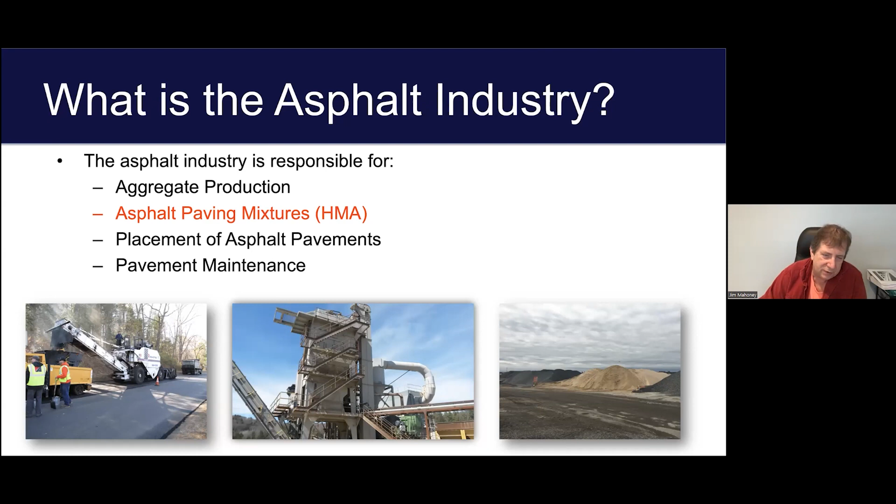So when do we take temperatures? We talked about the importance of temperature during production last week. We also need to check it out in the field, because if the material arrives really cold out in the field, you're not going to be able to compact it very well. And if you can't compact it, it's going to allow a lot more air voids in that material.

And those air voids are going to allow the oxidation to occur, and you're going to end up with a pavement failure. We want to check the temperature at the back of the screed as the material comes out from underneath the paver itself, because if it's not warm enough there, it's never going to be warm enough to be able to actually compact it with the rollers.

Each mix itself is specific to the temperature that it likes to be compacted at. And so each roller, we're going to position them to try to optimize so that we can get the best compaction we can with each roller, because the idea is to maximize the effort that you get with each roller so that you get good density.

We also need to keep track of the temperature so we can open the road to traffic, because if the material is still too hot when you open up the road, vehicles going across are going to start digging into that pavement, pushing and shoving it around, and it's going to be problematic. So we need to keep track of our temperatures, and there's many places out in the field that we're going to look at that.

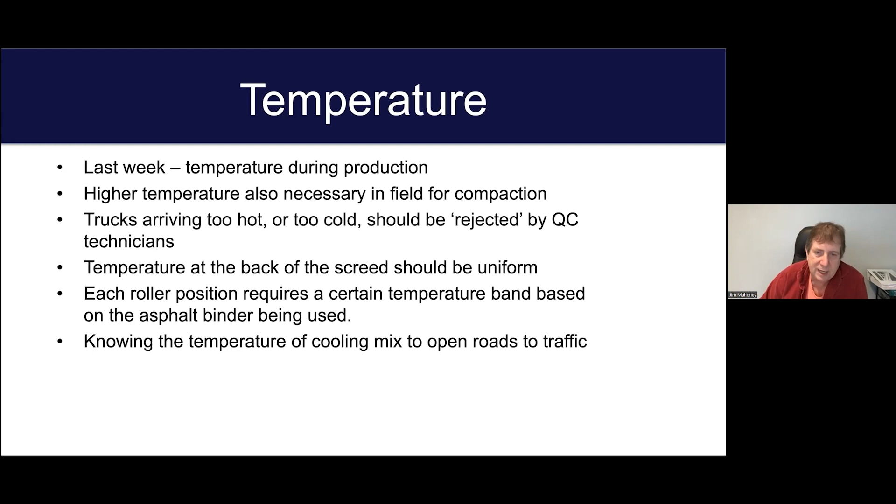We also need to look at the temperature of what we're paving over, because if that cold base material that's already out there is really cold, it's going to suck the heat out very quickly as well. So again, temperature is very, very important to asphalt, and we need to make sure we keep track of that throughout the production.

So you would take temperatures - you can see this guy over here on the left taking temperatures as that material is coming out of the back of the truck using an infrared temperature gun.

And then we have three general zones when we're actually compacting it. We have the breakdown zone - this is close to the paver, where the material is the hottest, and this is where you get the most density. We then have an intermediate zone where we're going to get a little more density out of it. And then we have what's known as the finishing zone.

This is where we're just trying to iron out any marks in the pavement from the actual construction, so that at the end of the day, when it cools off, it looks good and looks nice and uniform.

So the breakdown zone is where the temperatures are the highest. This is where you're going to get the most density. You'll get some additional density here, and very little density back here in the finishing zone. The further away from the paver you go, the more the material cools off, and the harder it is to compact.

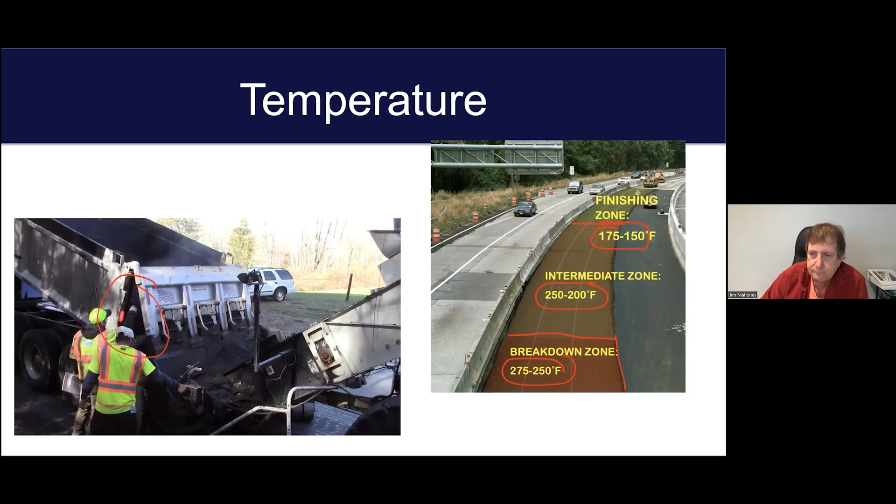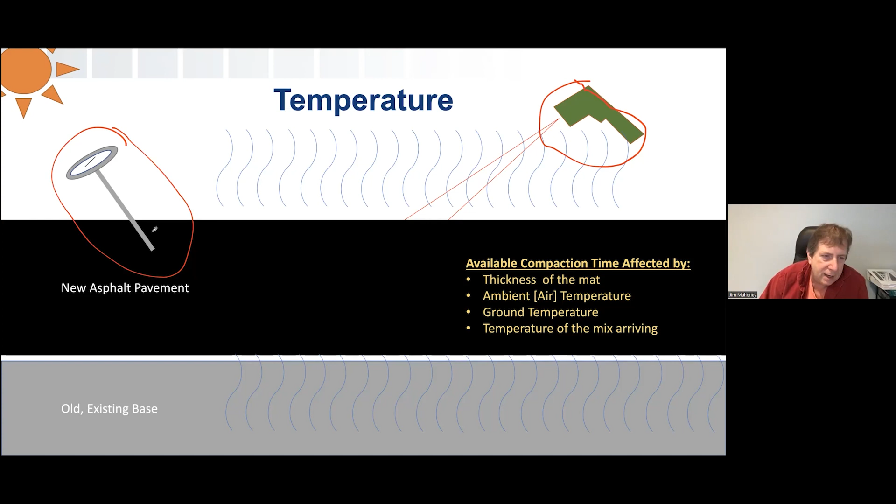There's different ways we can measure temperature. One thing we can use is an infrared temperature gun, which only measures the temperature of the surface. We also have temperature probes, where we can actually stick it into the material and measure the temperature inside the pavement, whereas the infrared only measures the surface.

Things that affect how much time we have to compact this material include how thick that mat is. The thicker the paving mat is, the longer it's going to stay warm, just because there's more of it. Whereas if you go really thin, it's going to cool off very, very quickly. That's one thing that comes into play, is how thick are we placing that pavement material?

What's the air temperature? That obviously is going to cool the pavement off as it's sitting there, so that's a temperature we need to keep track of. The temperature of the ground also matters, because if the ground is really cold, that pavement's going to cool off very quickly as the heat is sucked into that ground. And also, what's the temperature of the mix when it's actually delivered to your job site?

These are things a QC technician would keep track of, because in July, the temperature of the ground probably isn't that critical since it's going to be as warm as it's going to be. Air temperature is probably not quite so critical, but we still want to make sure the material is being delivered hot enough, and that we understand, for the thickness, how long we have to compact it. There's some software packages that can give you ideas as to how long you have to compact that material, depending on weather conditions and time of year.

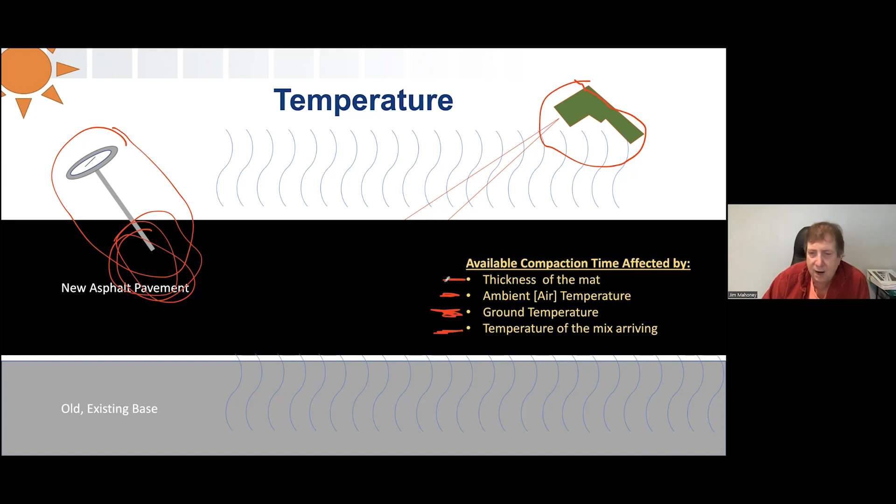When we go to sample our material, we have to look at something known as random sampling. No matter how careful we are, we can introduce bias into the sample. When we say bias, we're not saying somebody's intentionally influencing the results, but just by handling and sampling that material, we can bias the sample.

When we do random sampling, we're saying that sample can come from anywhere. Whereas if we leave it to our own devices without using a process, we're more than likely going to take it when it's convenient for us. Our first sample would probably come first thing in the morning, because I'm ready to go and want to sample now. Then we'd probably draw another sample mid-morning, maybe something right after lunch. But again, maybe that's not representing what's going on out there.

So we want to do a random sampling process so that every square foot of pavement or every ton of material produced has an equal chance of being sampled. Because when we do random sampling, we're trying to balance the risk between the people paying for the material and the people producing it.

If you have one bad truckload of material that leaves a mix plant and doesn't meet the specification, but that's the only spot you sample, well, there may have been 80 other loads of material that left that plant that were perfectly fine. But now that risk is on the producer because we only sampled that one truck, and we're going to characterize all 80 loads based on that one truckload.

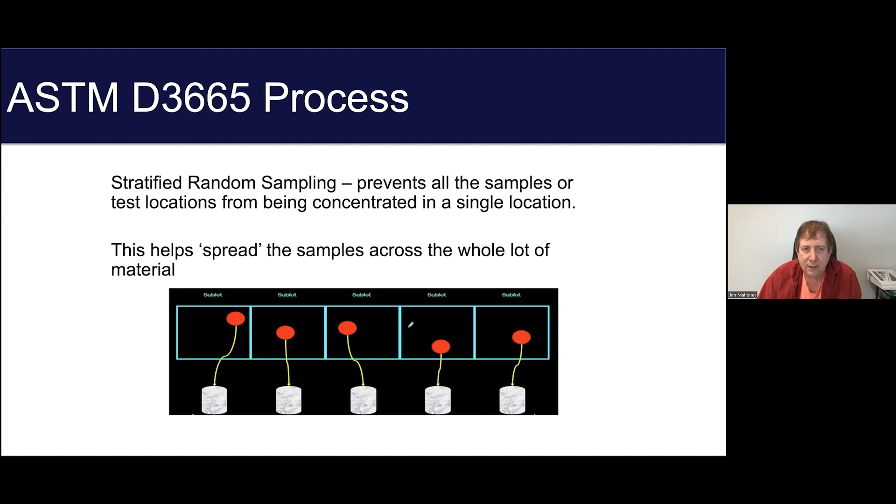It's called stratified random sampling when we use sublots, because what we're doing is forcing a sample to come from each of these sublots. It helps to spread them out.

If we just sampled randomly in an entire lot of material and wanted 5 samples, we could have all of our random locations fall in one little area just because of the way the random process works. So all our sampling could happen right here, but then we don't sample anything else. We have a good handle on what's happening in this one little spot, but we don't really know what's going on throughout the rest of that entire lot.

That's why we like the stratified random sampling routine, so that it forces those samples to come from throughout that entire lot.

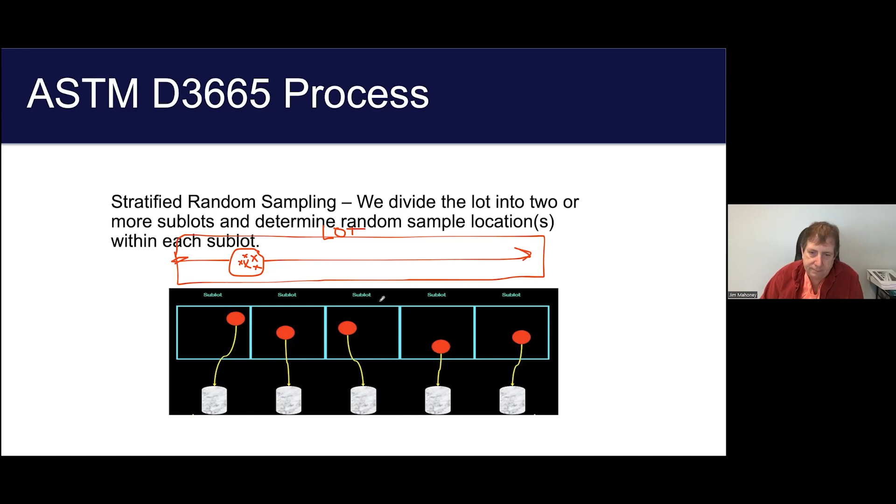For the random process, there is actually an ASTM standard, ASTM D3665, where we calculate random numbers. Some places will allow you to just use the random function on a phone or a calculator. Some places have spreadsheets programmed to do random numbers, and you would just put in how many tons you were going to be using, and it would help generate where those random numbers were located.

But again, it is a random process. It's not just walking down the road and sampling every third telephone pole. It's a very formalized process to ensure we're minimizing the bias that we're introducing.

If we wanted to do a random number calculation, we would take our random number and multiply it by the sublot size, and that tells us where in that sublot we're going to sample.

Usually we reference it from the beginning of the lot, so you have to add the tonnage or length from the previous sublots. If you're sampling in sublot number 3, you have to add the tonnage for sublot number 1 and sublot number 2. Let's say they're 500-ton sublots.

When we did this calculation, it turned out to be 75 tons. So our sample in sublot number 3 is going to come at 500 plus 500, because that's the size of the sublots.

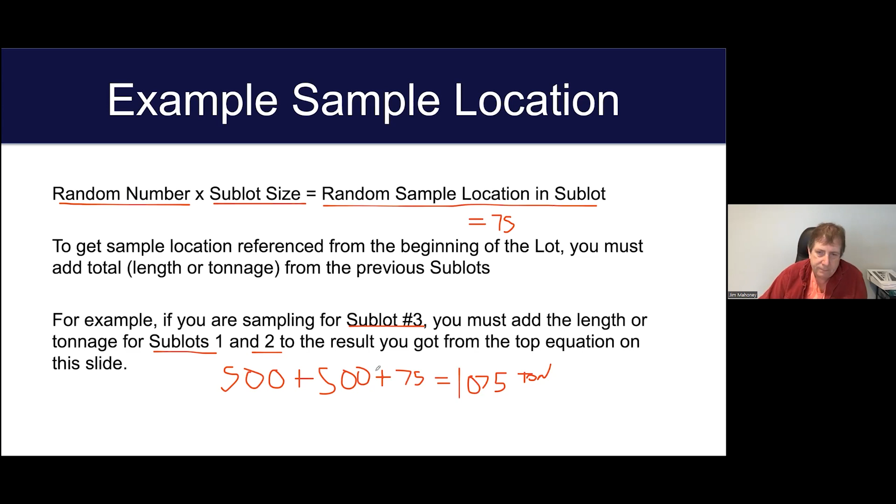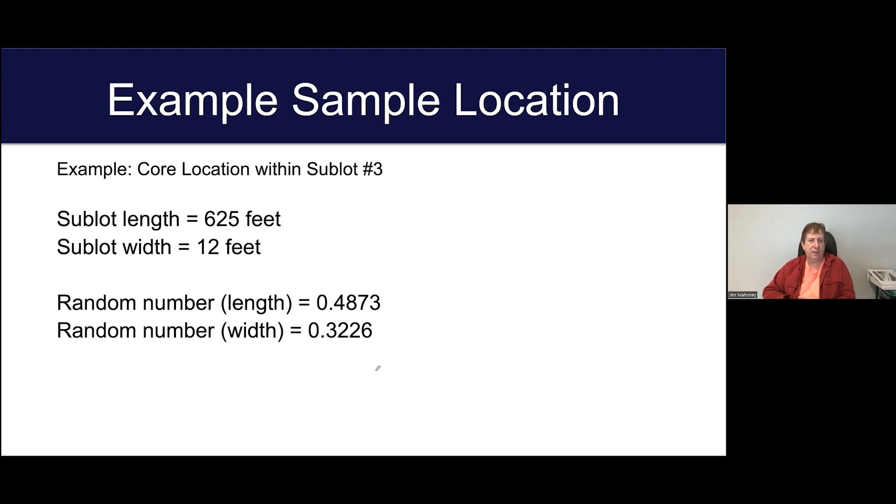Here's an example. If we have a sublot length of 625 feet and a width of 12 feet, we're going to divide this into 5 sublots. So to get to 5 sublots, we have 625 feet, and we divide that by the number of sublots, so each sublot is equal to 125 feet.

So yes, there is some math used in these processes. Each sublot is 125 feet long. We take our sublot at 125 feet and multiply it by our random number, which was 0.4873, and that gives us an answer of 60.9 feet within sublot number 3.

But remember, we have to go through sublot number 1 and sublot number 2 to get there. So we add 125 feet for sublot number 1 and another 125 feet for sublot number 2, that's 250, plus the length within sublot number 3, which is 60.9 feet. Our answer comes out to be 310.9 feet from the beginning of that lot.

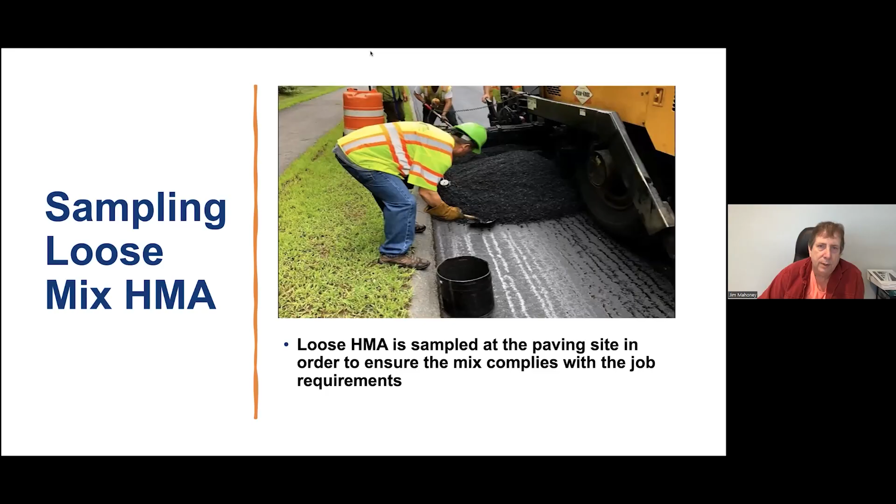We're going to talk, as Jim introduced, about how to generate a location or a time or a truckload, a random location for collecting the sample. And now we're going to segue into physically collecting the sample.

The reason we need to do this, as far as loose mix collection, is because we need to take it back to a lab, typically at the production facility. We're going to compact it in order to simulate various conditions like air voids. And we're also going to take the loose mix through a burn process to determine the actual asphalt content of the HMA itself.

And then we actually do a gradation as well. I know Jim and Alex talked about aggregates, I might not have been present for that meeting, but we go back through this deconstruction process where we verify that everything in the mix is everything that was prescribed for the mix. That's why we physically collect these samples on site and bring them back to the lab to run all these tests to make sure we're getting what was paid for. So we have to sample the loose mix.

In Connecticut, there's a requirement that the loose mix can't come from the plant. It has to come from the actual job site. And there are multiple different scenarios on the job site where we can actually collect that loose mix.

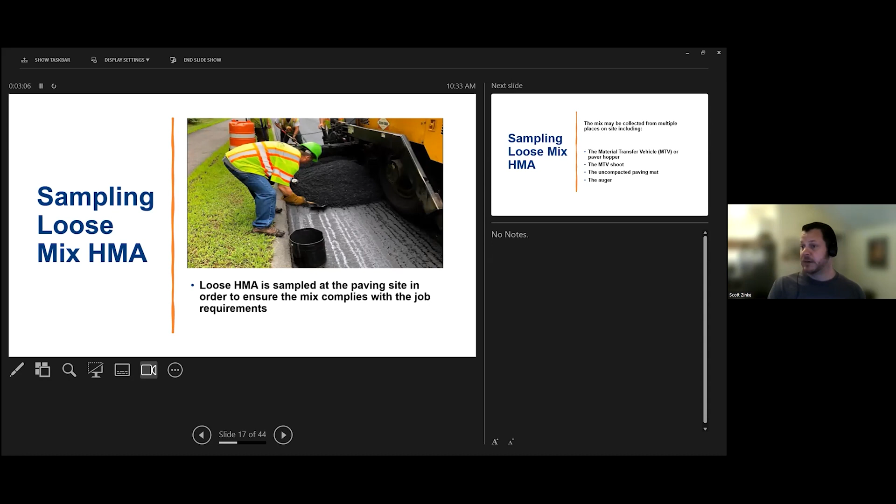The second bullet down is called the MTV chute. This is something that does happen periodically in Connecticut, and we're going to get into all these different scenarios. The third bullet down is the uncompacted paving mat. We have images of doing this from behind the paver prior to compaction, before the breakdown roller starts compacting it. And then finally, the auger, which you saw the image of earlier. This is called sampling from the auger, and it's very common in Connecticut on DOT projects.

So sampling from the MTV or the paver hopper, what you're looking at here is a paver hopper. The truck that delivers the mix to the job site dumps directly into the paver, or it might dump directly into the material transfer vehicle hopper that receives the mix. The way this is done, there are some safety issues we have to address first, because you're on site and you have haul units or trucks full of mix routinely backing up to the material transfer vehicle or the paver hopper.

There's a safety precaution that has to be taken so there's not a pinch point. The last thing we want is for somebody to get hurt, or possibly even worse than that, when a truck backs up. So we make sure that the trucks are stopped, and the paver actually has to stop, or the material transfer vehicle, whichever you're sampling from, has to stop.

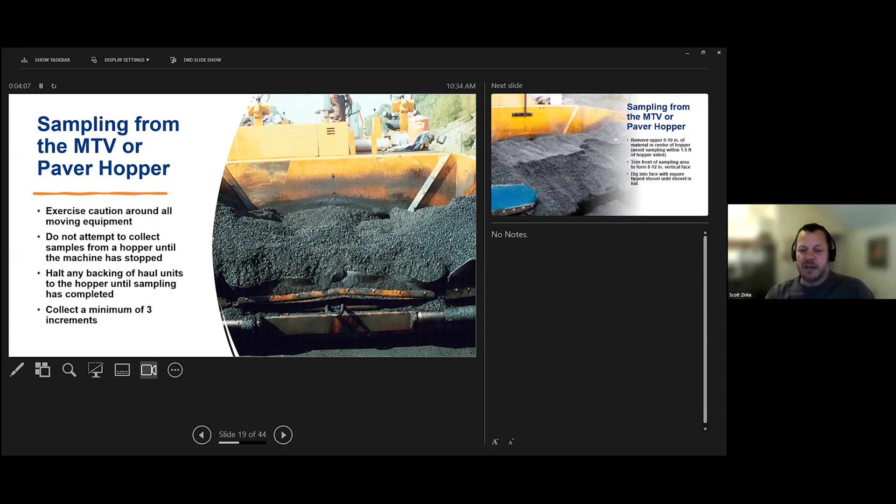Then we're going to collect a minimum of 3 increments of this mix directly from that hopper. The way AASHTO says to do this is to create almost a vertical shelf, which you can see in this image. We're going to remove the upper 6 to 10 inches of material from that pile, then scrape down the front of that pile in the middle of the hopper area you're facing, about 8 to 12 inches. That forms the vertical face we want to collect our increments from.

We're going to collect a minimum of 3 increments by inserting our square shovel directly into that face, depositing that material into buckets, and then thoroughly recombining those increments for our field sample. This is one option that is allowed through AASHTO R47, R97 for the collection of mix.

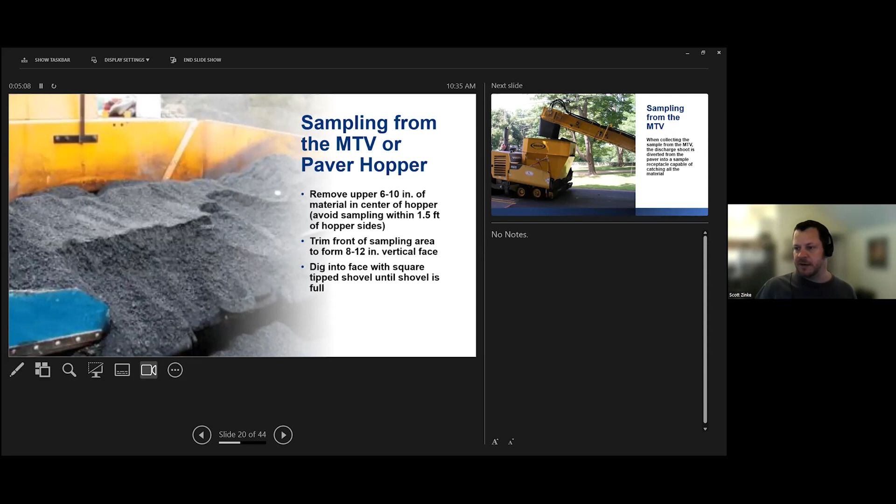Another option we have, I mentioned material transfer vehicle. On the left-hand side of this picture, what you're looking at is a paver. You see the word Weiler on there, that has what's called a paver insert. On a job like this, where there's a material transfer vehicle depositing material into that paver hopper, it would be impossible to stand in front of it and collect mix out of it with a shovel, because it's way too high in the air.

So in any case, the option we have is, if we wanted to collect from a hopper, we would have to take it out of the hopper from the MTV, or we can take it from the chute of that material transfer vehicle, in which case we would have a wheelbarrow or some sort of a large receptacle.

Let me see if I can get a highlighter here. Stand by, generally I'm depending on Alex to do this.

There we go, highlighter. So this is the chute, and this is the boom here. What we're looking for is we'd have the operator swing that boom over to the side, and that would deposit material directly into whatever our sample receptacle is. Typically that's going to be some sort of a wheelbarrow, but it could be any sort of chute, maybe on the back of a pickup truck, to completely interrupt the flow of that material as it comes out of the discharge of that chute.

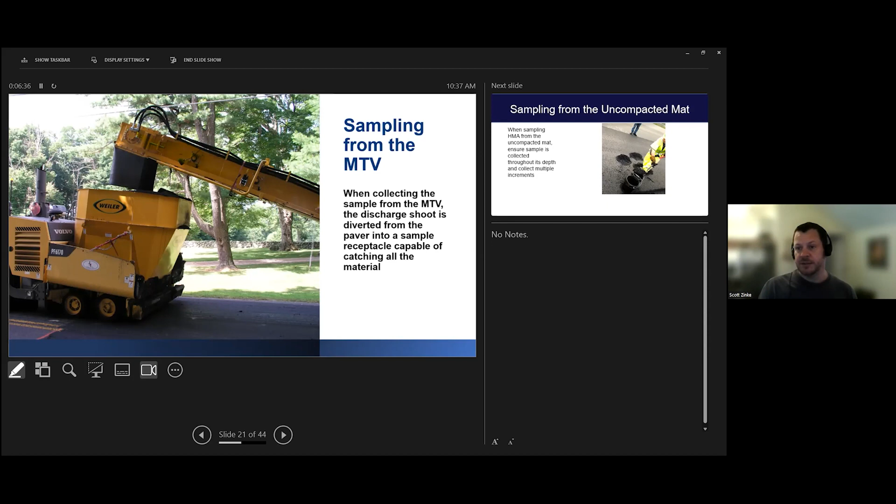That's another option we have when collecting this loose mix on site. Another option in accordance with AASHTO is sampling directly from the uncompacted mat. We collect a minimum of 3 increments off of the mat, dump those into our buckets, and then that material gets thoroughly recombined for our field sample.

This involves a little bit of coordination because it has to happen prior to the application of the breakdown compaction unit, the breakdown roller. We've got to make sure it happens directly after paving but prior to breakdown, when we fill up our buckets. Then somebody has to come through and be responsible for filling in those holes left by digging into the mat with some hot mix. So this is another option that we have.

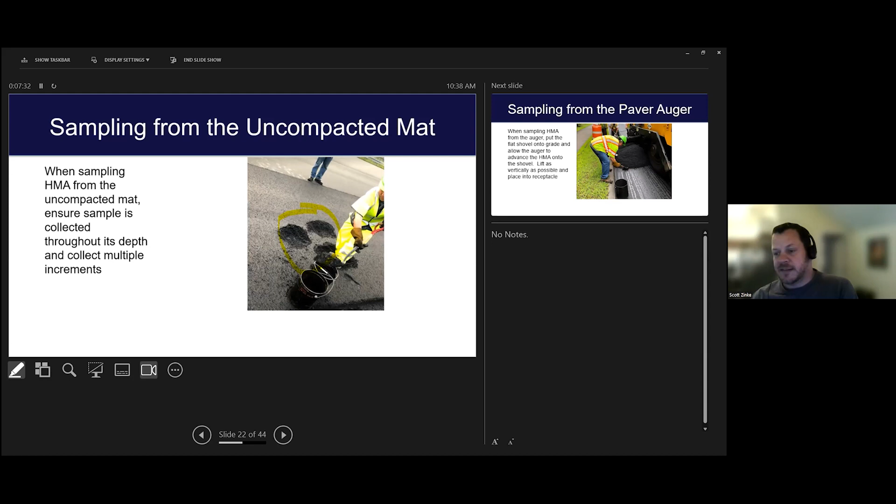The most common options you're going to see in Connecticut with respect to sampling mix directly from the paving project are going to be collecting material from the auger or collecting material from the material transfer vehicle itself.

In Connecticut, we have a requirement, where applicable, that we use material transfer vehicles. Sampling directly out of the hopper of a paver would be virtually impossible on most paving projects.

The idea when sampling from the auger: you've seen videos in past classes where the paver is advancing. The paver has an auger and a screed, and the auger advances material forward and out to the screed as the paver moves forward. What John is doing in this picture is laying his shovel directly on grade, and that pile of material is being advanced forward.

As soon as the pile covers his shovel, he's going to lift as vertically as possible. That's a hard thing to do, but straight up through that pile, depositing the material into the bucket he has ready to go.

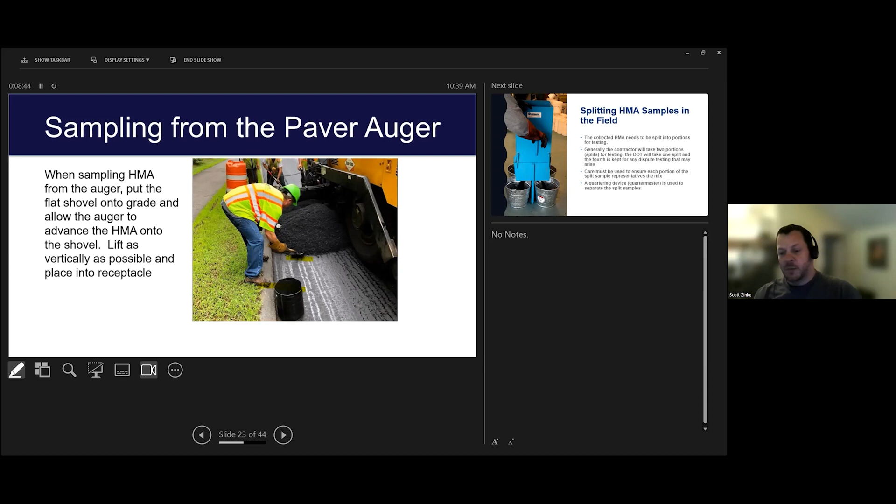He'll keep doing this, and it's more convenient to have two people, one to advance the buckets as you're shoveling into them, because this is a mobile operation. The paver is moving when this happens, so it's much easier with two people involved. Those are the options you have for collecting the mix.

When we collect mix, there's quite a bit of it, and it needs to be broken down into portions so that we can box it up, and the different boxes of material go to different places for testing.

Once we have that material, in Connecticut it's required that we use this splitter here, called a quartermaster—you can see it actually has a label that says quartermaster. This HMA material collected on site needs to be broken down into test-size portions, and there's a requirement for how that's done.

We can't just shovel some into one box and pass that off, then shovel some into another box and pass that off. It's got to be done in a uniform manner. When we say splitting the HMA samples in the field, the objective is that all of the split samples have the same continuity, the same uniformity.

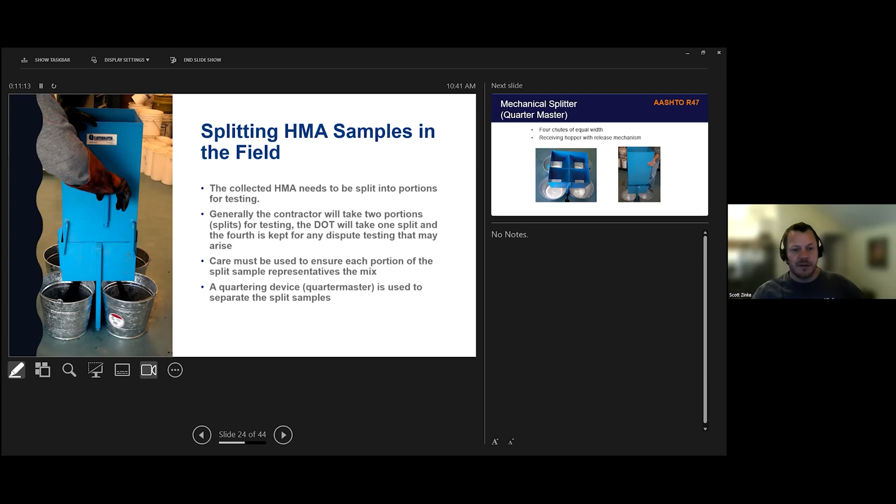If we test one box versus another, ideally we would have split them in a manner that gives repeatable results—hopefully identical. So there's a uniform process we have to follow, and in Connecticut we use this splitter called a quartermaster.

If you look at the quartermaster, before you put the hopper onto it, it's got four chutes, and underneath each of those four chutes we use some sort of sample receptacle—in this image, buckets. Each of these chutes deposits material into one of the four containers underneath it.

On the right-hand side there's a hopper—this is what the bucket full of collected mix gets dumped into. It has basically a trap door, a release mechanism with a two-part door. You're looking at the back side of it, but over here you can see the handle. That's basically like a false floor, so it locks up to hold the mix.

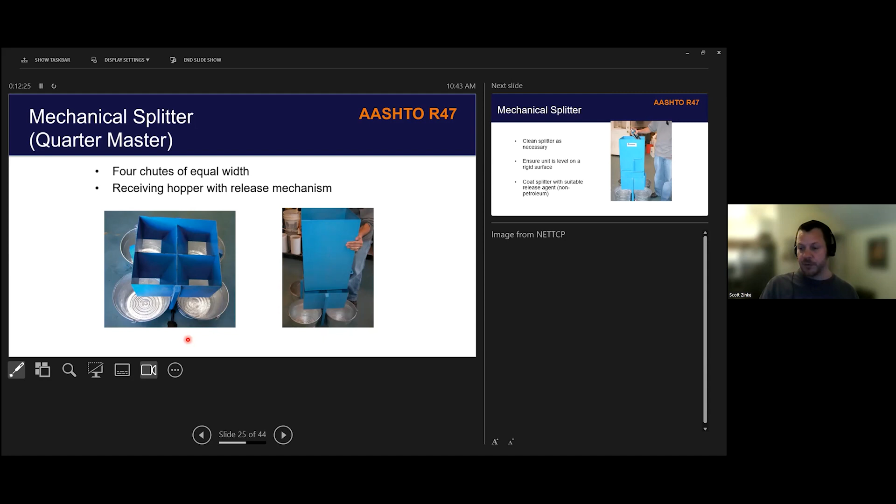We can finish filling it at the top, and then release that, depositing the material evenly and uniformly into each of the four sample receptacles underneath the splitter itself.

With repeated use of these splitters—this is a nice clean setup in this image—but with repeated use, the asphalt tends to build up on the chutes, the hopper, and the buckets, just like everything else used with hot mix asphalt. So it's a good idea to keep it clean, using a non-petroleum based release agent to help keep it clean with each application.

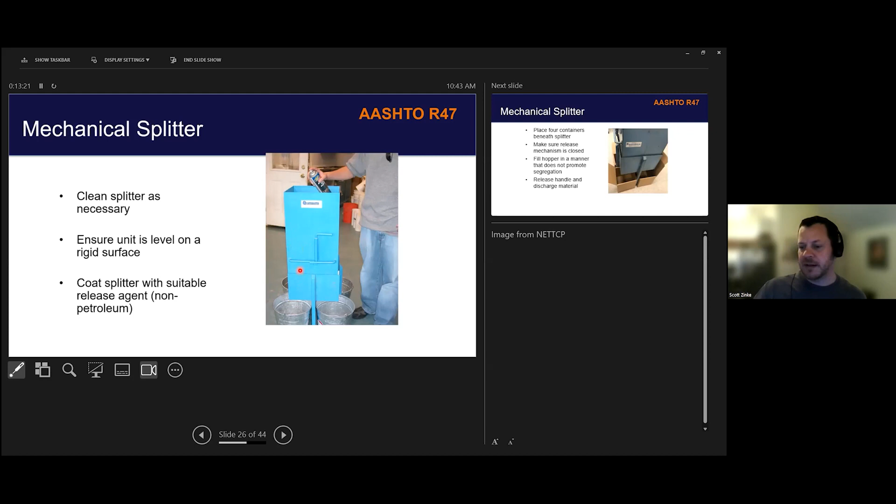And that's what's going on here with respect to the application of that release agent. And what you'll notice down here in this area is each of those flaps that exist - it's a 2-part door. Those get raised up and locked into place with this mechanism here. When we're ready to go, after we've dumped our material in there, we will flop that lever over, that releases the door.

And that material gets deposited over those 4 chutes and into the sample receptacles. So we have the option of using sample boxes as well - it's not just buckets that can be used for receptacles. And that makes sense because in Connecticut, the mix actually gets boxed up prior to being sent to wherever it's going to get sent to. We'll talk about that in just a minute.

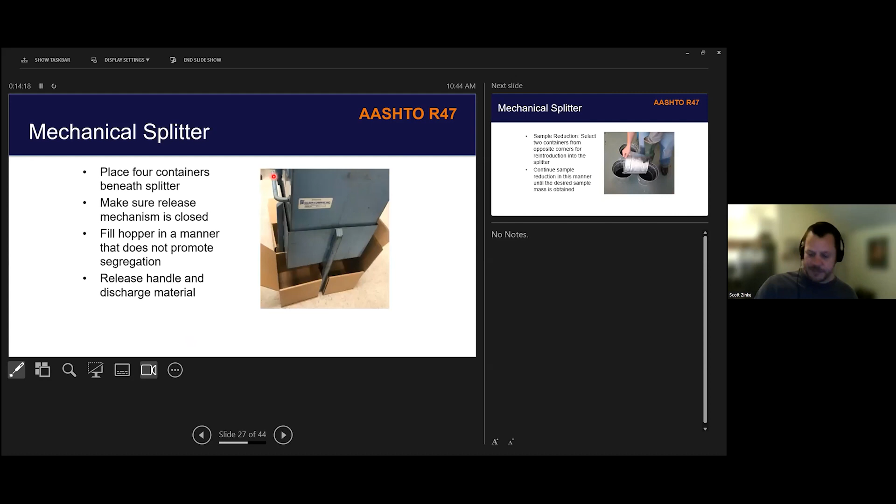So we put the splitter down and make sure the chutes and the chute walls and the hopper and everything are all clean. And we're going to raise up the floors and lock the floors so that they're closed. We deposit all of our material into this hopper here. Once everything's set and we have our sample receptacles set underneath the splitter, we're going to release that lever right here, and that drops each of those doors down. Hopefully, to the best of this unit's ability, it's going to drop that material and uniformly distribute it into each of those sample receptacles underneath that splitter.

Now, in the event that further splitting is required, the way that AASHTO R47 says to do this is you're going to take 2 of these diagonally opposite receptacles and return them to the splitter hopper. And you would repeat this process until you're down to what is called your required sample size.

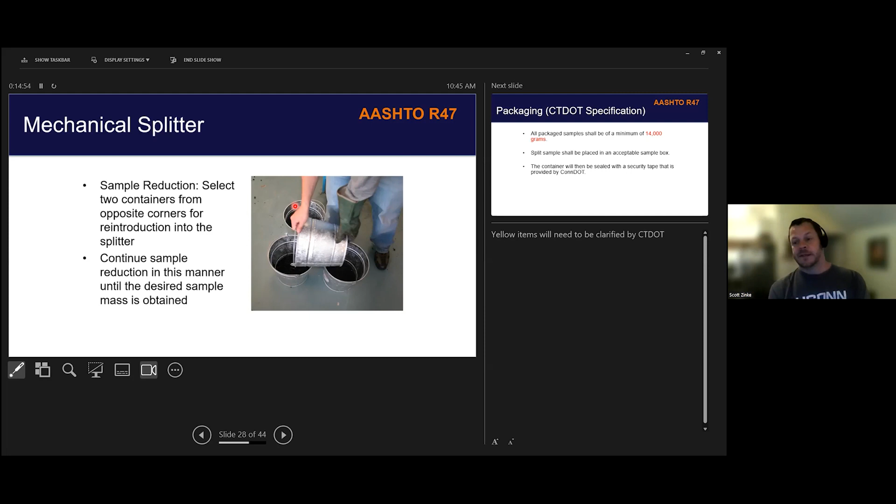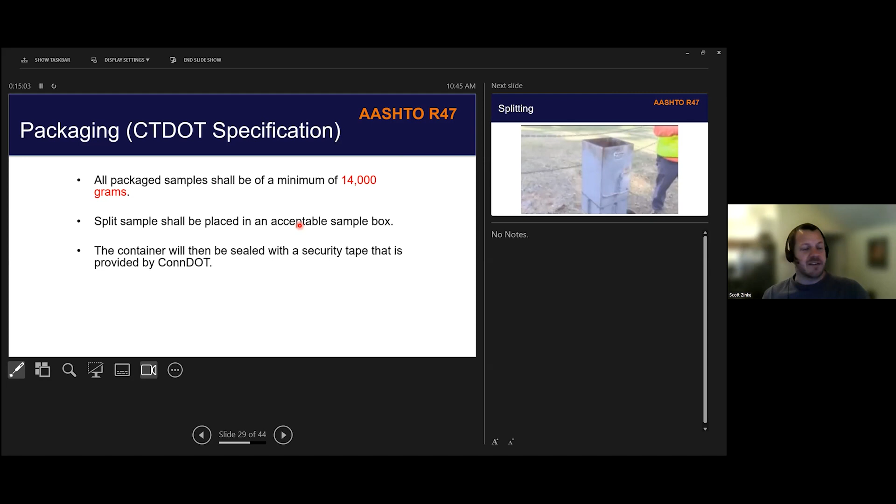In Connecticut, for the way splitting is done, specifically for the requirements to meet Connecticut DOT requirements, generally that's not going to be an issue because it's a substantial sample size that is required - a minimum of 14,000 grams per box. That's a significant amount of material, and so typically further splitting is not generally required. But if that were to happen, you would split it exactly in half and then repeat that process.

So in Connecticut, what's going to happen is we're going to end up with 4 samples from that split. Each of them are going to get taped up and sealed with that security tape provided by somebody from the DOT that is on site. There's going to be 4 boxes. One of those boxes gets taken back to the facility, and it gets used for testing for volumetric purposes.

And when I say that, I mean things like air voids. There's going to be one of the specimens that goes to generate a gyratory specimen - it's going to get compacted in the Superpave gyratory compactor. Part of that sample is going to be used in the ignition oven to determine what the actual asphalt content is. And then there's going to be a sieve analysis or gradation done on the material that has had the asphalt burned off of it. So there's a lot of stuff that takes place with that collected loose material.

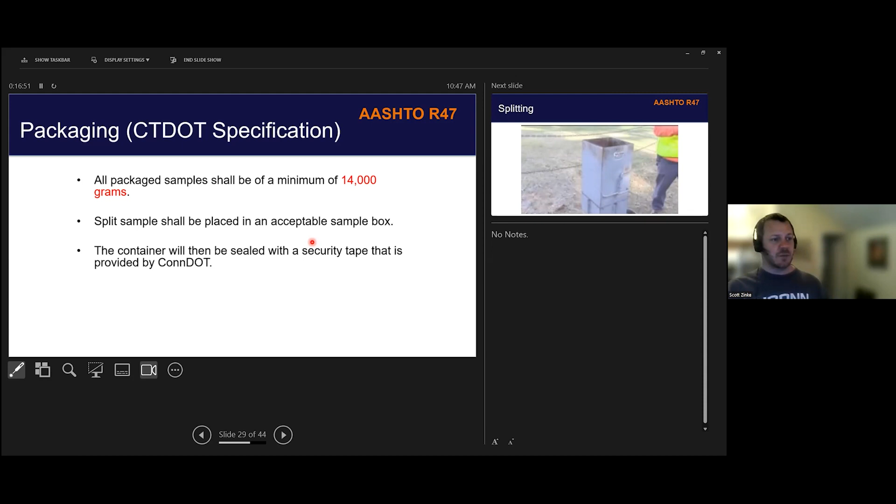The other 3 boxes contain the same material. One of them gets kept for a potential dispute resolution, which is part of the QA process in case further testing down the road is needed, if there's ever a dispute as to the quality of the material and ultimately payment. There's also another box that gets used for what's called assurance - potentially an assurance that gets run on some of these various mixes. One box gets reserved for that, and another one gets shipped off to the Connecticut DOT for testing at their laboratory. So there's 4 samples that come from each one of these splits, and each one has its own intention.

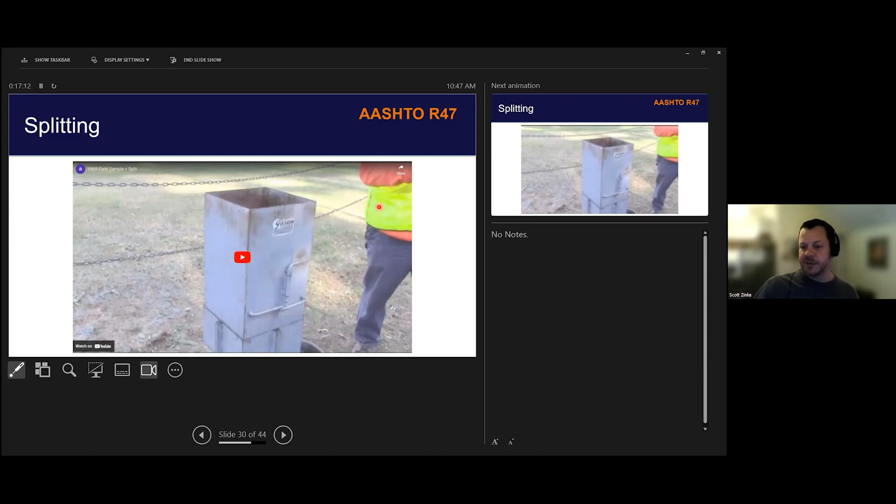So now I'm going to show you a video. This is the actual split process. Given the time, we have a couple minutes, a few more minutes left. I'm going to show you this video. I'm going to reduce the sound and just narrate over the top of it. This is a lengthy video.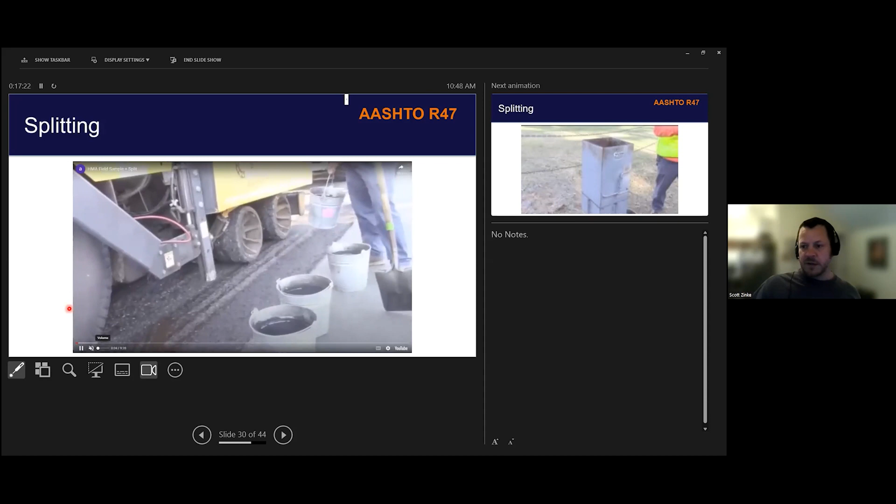Okay, so this is a video right now showing you the paver that is advancing down the roadway, and this is an example of collecting mix from the paving auger.

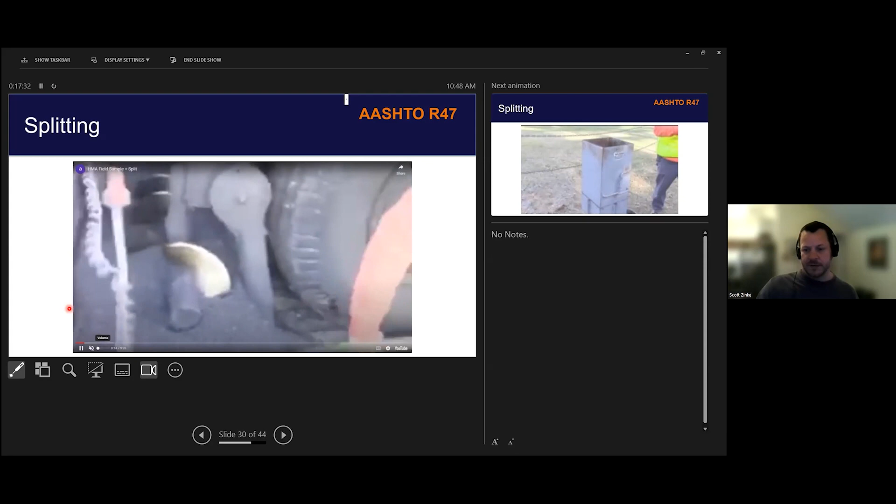Now there's two different ways this is done. They had some safety in mind. This is not a bad option. They stopped the paver. The paver is not always going to stop. It depends on what's been coordinated on that paving project. But you see the auger here that is advancing material forward prior to it being sampled.

And those sample buckets are the receptacles that we're going to use, and ultimately that mix is going to get brought over to the splitter. So this is an example, like I mentioned, this is very common in Connecticut to get mix that is sampled directly from the paver auger.

Advance this a little bit. Okay, that gets brought over to where the splitting is going to take place. And so there's the splitter on the bottom.

Jim, is this coming through okay? Is that actually playing? Yep, okay, it's fine. I want to make sure it's not too grainy or broken up or anything like that.

Okay, so that's the chutes are here. Let me get my, I think I can use my laser here. Yeah, that's all right. In any case, so they're going to get, there's a non-petroleum based release agent.

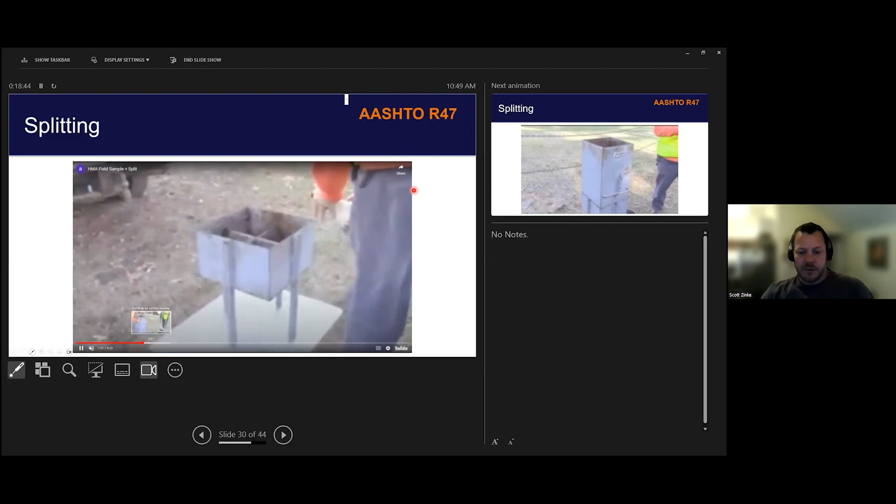So everything doesn't stick. Then they're going to put the hopper on there. They're also applying release agent here. Okay, and those doors are going to get locked shut.

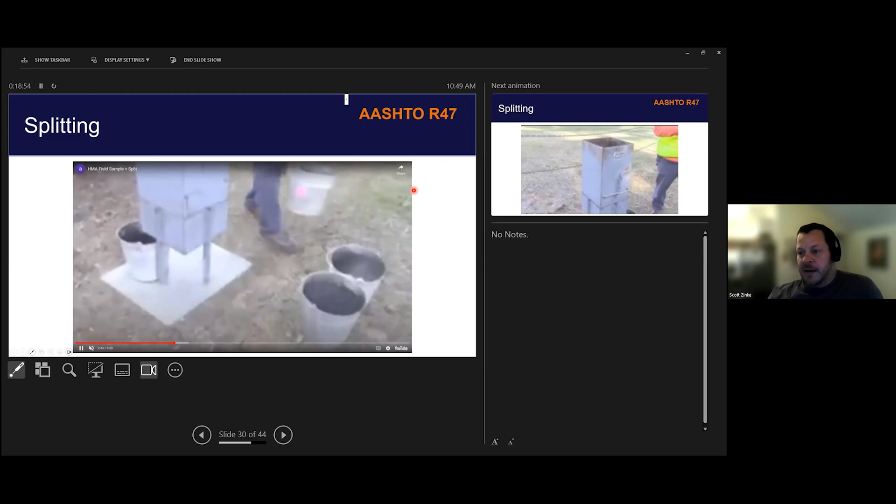Okay, and now each of those buckets are going to get deposited into that hopper, and that's going to hold the material.

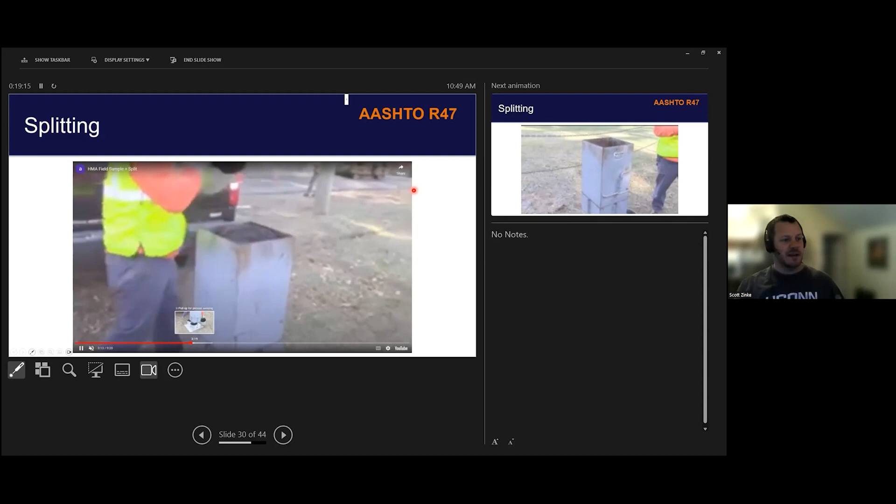And so the idea, again, is by the time we have these 4 splits, right, that they're going to all have a uniform consistency to them, meaning that I should be able to take one box or another box, or you could take a box or whatever.

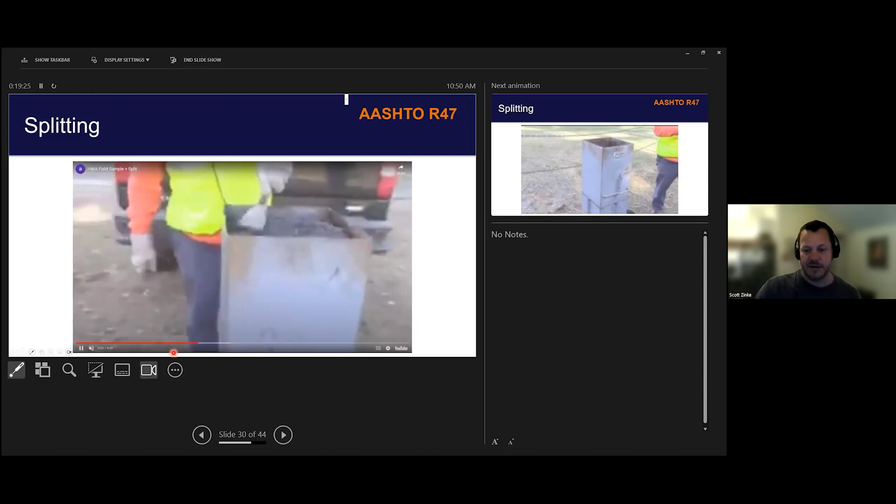If we compare results from testing, they should all have the same properties. And that's the idea behind the utilization of one of these mechanical splitters, is that all of the split samples are uniform. So that's a material that is as it exists in the splitter hopper.

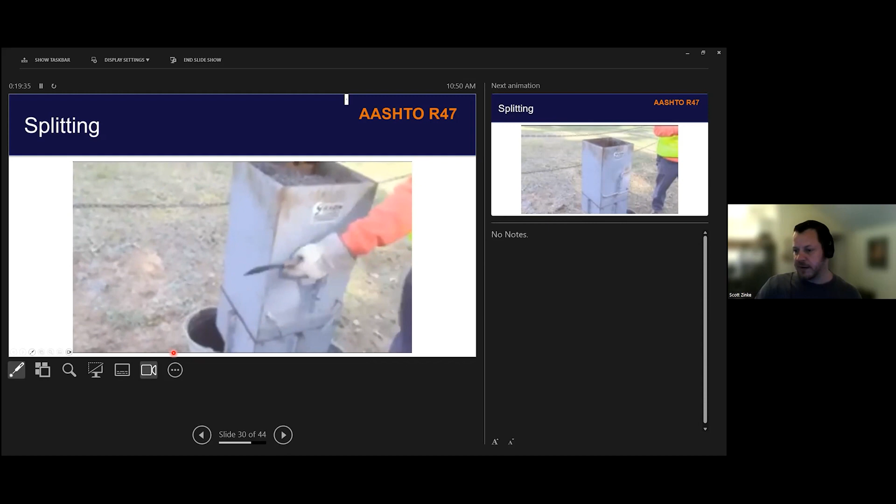Okay, and now the trap door is going to be released. That's that lever right there. And that drops the material, deposits it evenly into those buckets or those receptacles underneath.

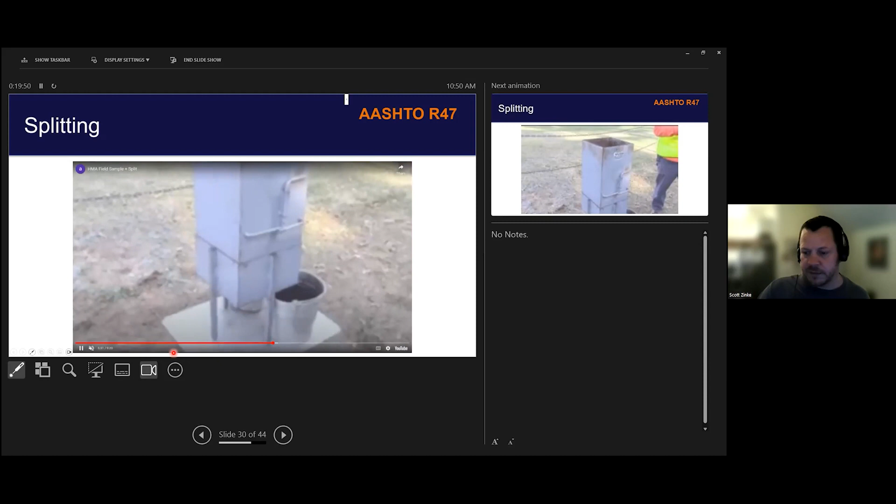Let's see, I'm going to advance forward here. I think we have some of the boxing up. Yeah, this is just cleaning the splitter, which is necessary, and just further splitting here.

All right, and this is showing them dividing up those materials that are split into those receptacles into boxes that are then going to be taped with the security seal from somebody from the Connecticut DOT. They're going to get labeled.

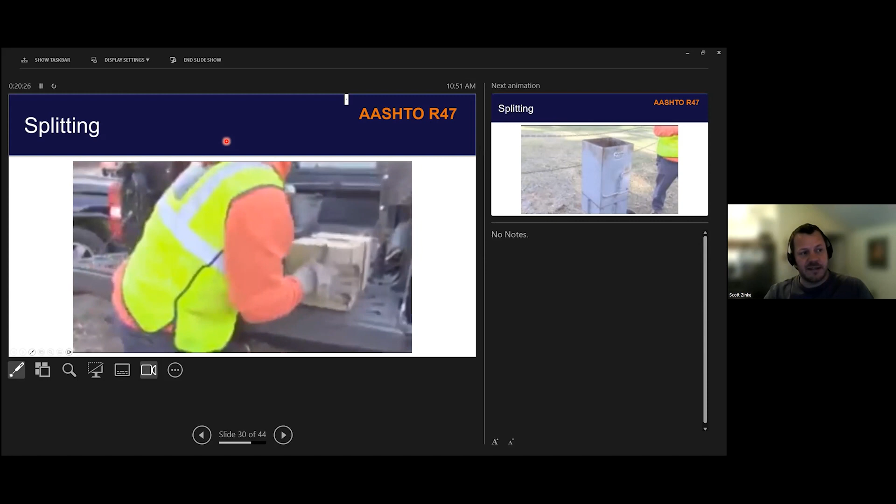And again, one of those goes back to the Connecticut DOT Central Testing Laboratory. One of them gets used for testing at the facility, and 2 of them get kept, one for assurance testing potentially later on, and another one for potential dispute resolution.

Okay, going to advance here. And so that is sampling loose mix as well as splitting loose mix for future testing. And again, just as a reminder, the reason that that's done is because we need to routinely be able to collect and assure the contents of the material that's going down into the field.

Okay, so whoever's cutting the check for that particular project, which is generally a hefty amount of money, wants to verify that they're getting the correct amount of liquid asphalt binder, that the gradation of the aggregates is actually what it's supposed to be, that it meets job mix formula requirements, whatever has been submitted and accepted for that project prior to its construction, and all the other volumetric requirements that might be part of that as well.

And so that's the reason why we collect this mix, and we want it to be uniform. We want each of those samples to be completely uniform, and that's why there's a standard uniform procedure for being able to split those materials as well. Now, another form of sampling hot mix asphalt is actually collecting density specimens from the field.

And that is obtaining cores. There's a separate AASHTO designation for this. That's AASHTO R67. And the reason that we would want to cut a core from the roadway and then measure

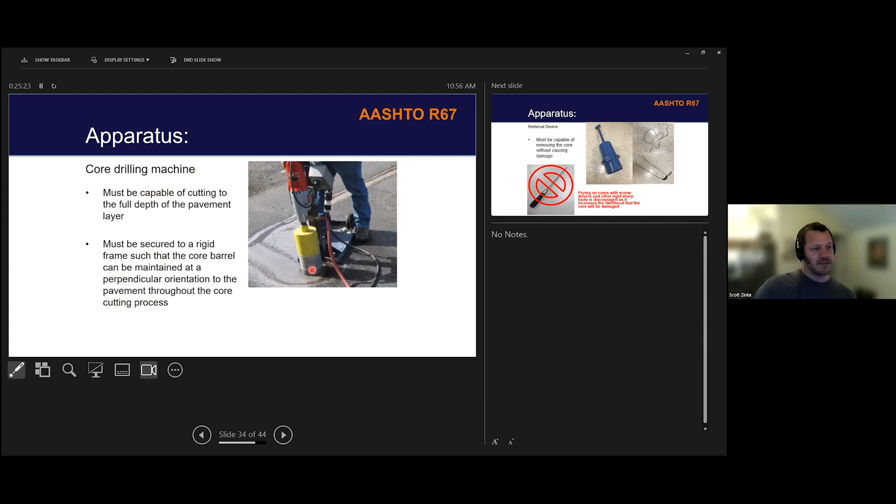And then this barrel, this yellow tube that you see here, has diamond. There's carbide, it's a combination of carbide and diamond teeth that exist at the bottom that are used for cutting through the asphalt pavement, to get us the core that we're looking for.

Once we cut to the desired depth, core retrieval is not always as simple as just reaching down and picking up the core. It can be pretty tricky to get them out. And again, the whole idea is that we pull those cores out in a manner that is not going to induce any damage.

We don't want to cause any damage to that core because we want to use it for measuring density. If we cause any damage to it, that's going to decrease the density, and that's going to cause problems.